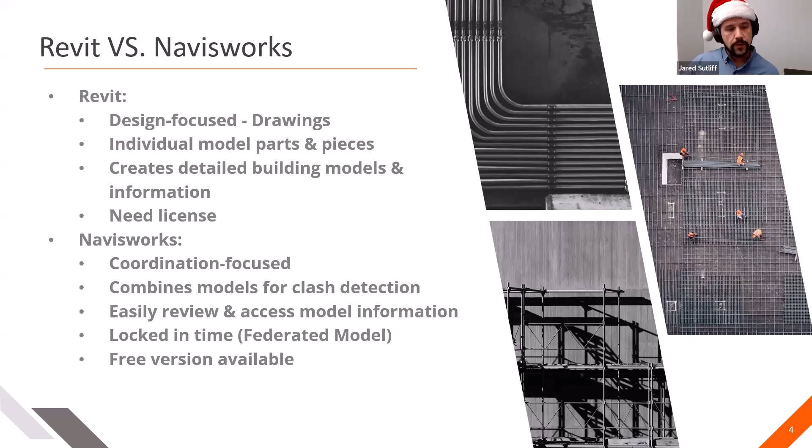Navisworks itself has 3 different versions: there's the Freedom, which is a limited version, Simulate, which is an expanded tool set, and then Manage, which is the full gamut, which allows you to do the clash detection, coordination, etc. The 3 main files that Navisworks utilizes are NWDs, which is taking all of the different models that merge together, and that's that federated model locked in time; the NWC, which is one of the exports available out of Revit and some of the other 3D modeling softwares; and then the NWF brings all of those different merged models together, which is then what we utilize.

So getting started here within Navisworks, when you first open up Navisworks Freedom, there's a few things that are important to start off with. First off is going into the options editor, under the N in the upper left-hand corner. We can expand this window out a little bit.

The most important thing to start off with is under interface, going into our display units. We want to change this from meters to feet and inches fractions. For display precision, you can choose any one you want. I'll typically stick with a 16th or an eighth of an inch, whichever is best suited for what you need to utilize within Navisworks.

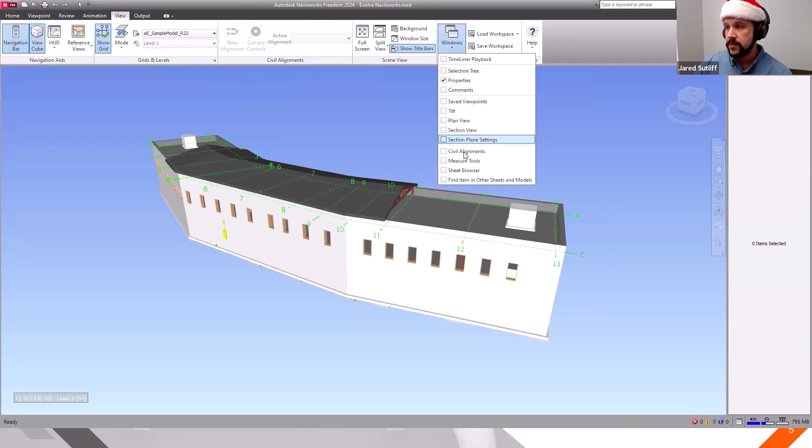We can also find our properties window under the view tab, and we've got our windows drop-down right here. This will give us all the options of any additional windows that we want to utilize.

I also like the selection tree, because it gives me a little more information as to the files available within this NWD, and that'll help you navigate and find which subcontractor the model is a part of.

I will also turn on the saved viewpoints. This is important because any of these viewpoints gives you a location that will automatically jump back to a specific camera spot. So let's pretend you're running around and all of a sudden you're lost in space and can't find the model at all. With the saved viewpoints set up properly, you'll be able to just select that and it'll bring you back to that specific point within the project.

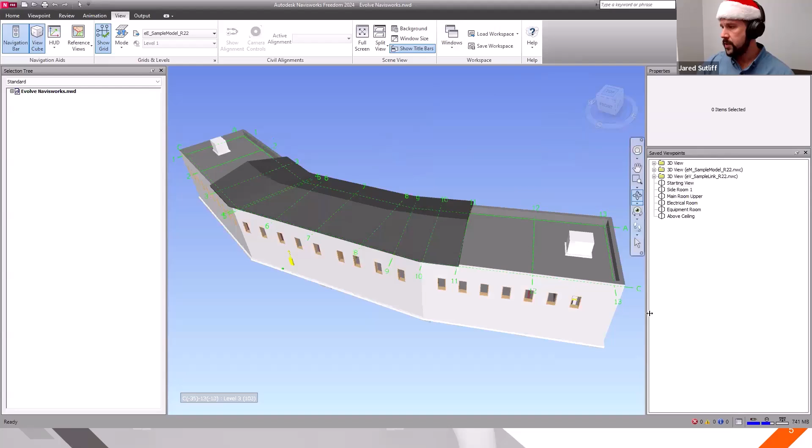And then I also like to have the plan view. What the plan view is going to do here for you... I have it hidden somewhere, I'm not sure where it is, I must have it docked in a different spot. But what that does is give you a separate window with a top-down view of your model and building, which helps you understand and navigate to where you're at when you're flying around.

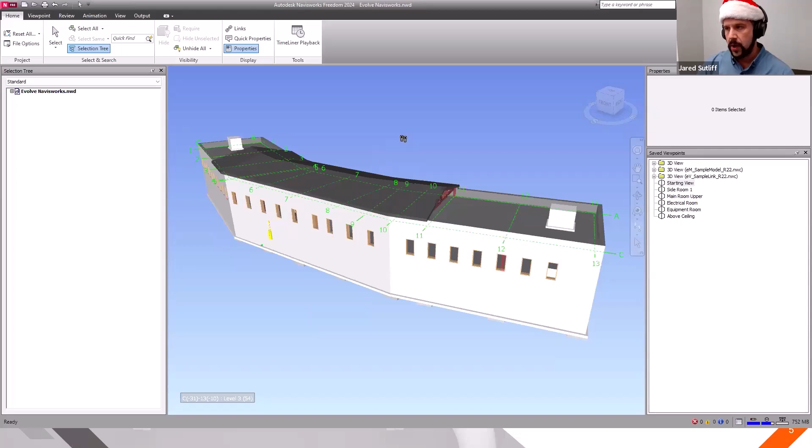So as we proceed, there's a couple of tools, and it's going to be a bit of a pain to get used to. But I recommend forcing yourself to learn the walk command. It's a little bit like a game, and it utilizes your mouse for all the tools. As you can see, the little feet icon here, if you left click and hold the button down and push your mouse forward, you'll walk forward.

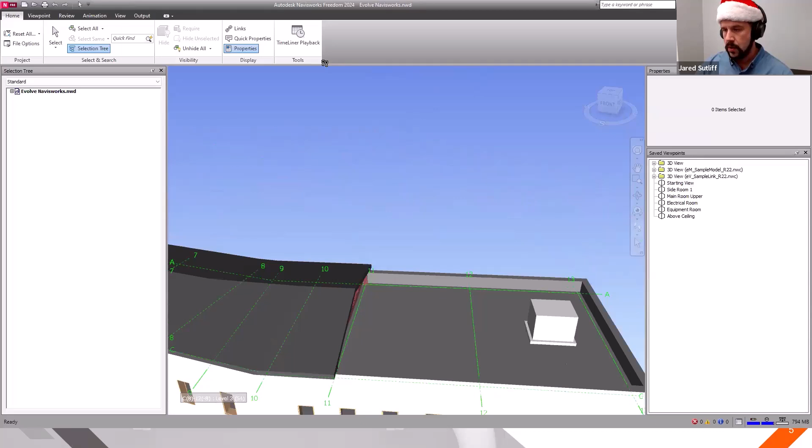If you pull the mouse backward, you walk backward. And if you turn to the right or left, you can see it rotates the camera. Any combination of these lets you move forward and roll around, so it's like you're walking through the building using the mouse.

It also combines your pan into this single tool. If you have a mouse with a middle mouse button, depressing it gives you the pan, which lets you move up, down, left, and right on a single plane within the space.

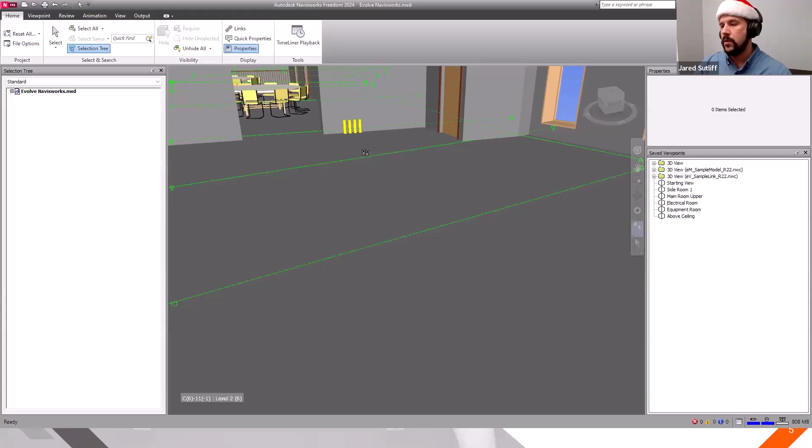If you roll the mouse button backwards, you'll tilt the camera up. If you roll it forward, you'll tilt the camera down. That said, there are also other tools available on our quick access toolbar.

If you hover over it, it brings up a little window, with our pan tool. With that tool selected, I left click and hold, and as I move and drag the mouse around, I can shift and move via the pan, same as depressing the middle mouse button.

We can also use the zoom window. If we select this tool and left click, hold, and drag, it brings up this little box, which zooms into that portion of the model you were trying to focus in on.

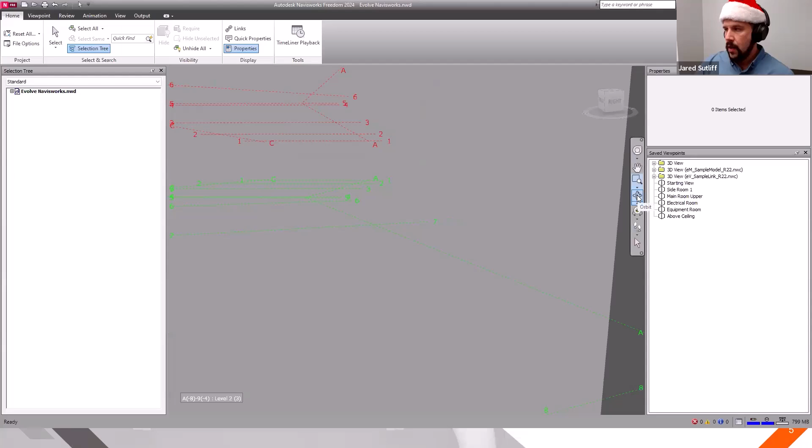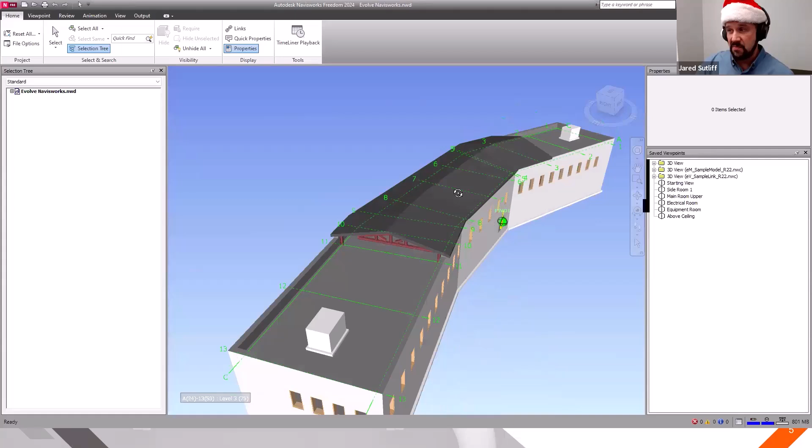Our orbit command does just that. It has a specific pivot point on our building, off to the corner here. The pivot point has given me some trouble in the past—sometimes it'll snap to a point of the model that's say, like 10 miles away, and as soon as you rotate, you lose track of where you're at. But this is an option.

If you select the object, it'll allow you to focus in on that, with your pivot point in the center of that object. I just did a right click, which allows me to select a specific object—for instance, in my main room here, I left click and select this clearance zone, and with my orbit, you can see it centers in on that selection.

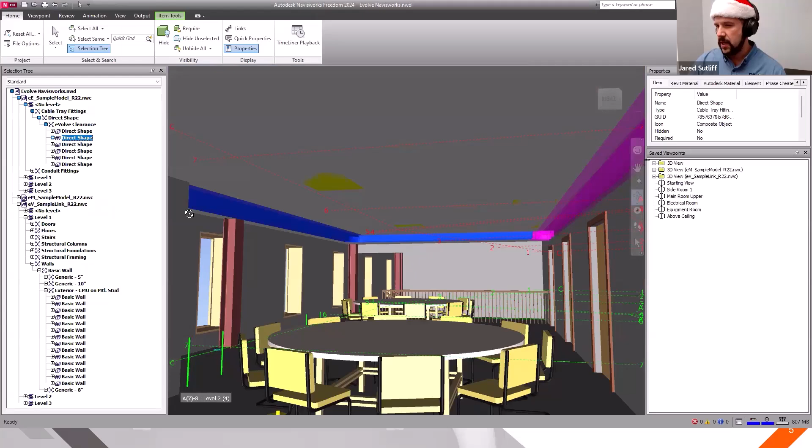The next one is look around, which is pretty nice if you've got yourself into a room, say like the electrical room here, and you select the look around command. It just rotates the camera on a swivel, so you can really get a sense of what's going on as if you were standing in that room specifically.

And then the last one here is our select. That allows you to go through and use your select—instead of right clicking to select objects, you'll be able to select each of the individual components within your model with that.

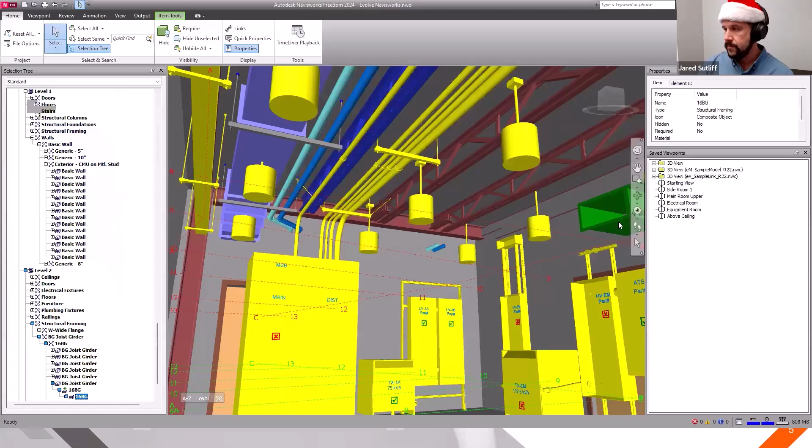With our walk command here, I'll go back into our starting view. If you have multiple monitors and want to free up space in your main window, any of these additional tool windows, so long as they have the pin command, can be moved.

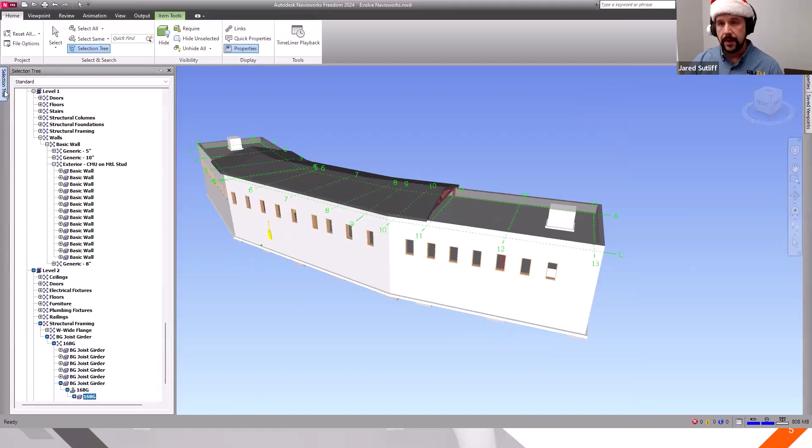It's an auto hide feature, so if you have them unpinned, you'll see it puts the tab on the side. If you have it pinned to your main window, you can grab the title here, and that brings it into a secondary window that I can move to a different screen.

If I want to place it in a different part of the window, I can do that as well. As I left click and hold, it gives me some options with these little icons, showing the size and space I'm able to use. If I go to the center, it leaves it as a free secondary window. In this case, I'll leave my selection tree tied to the left-hand side.

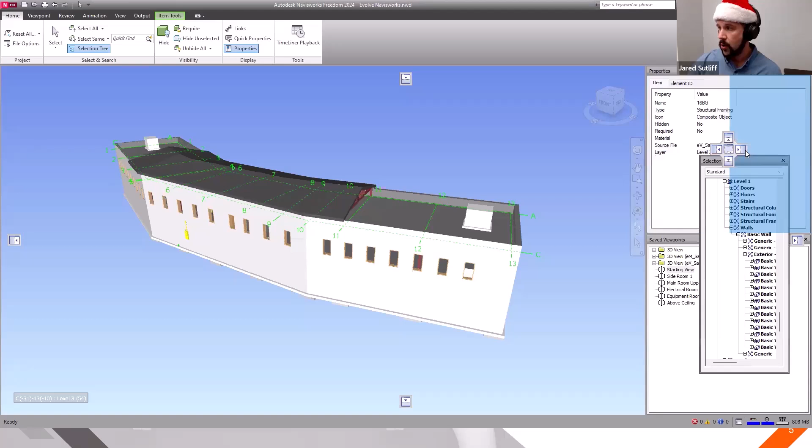Same thing with the properties and the saved viewpoints. The other nice thing you can do, if you want to have them all grouped together, is come over to properties here, and you can tie them into just this secondary properties window. So if I want to have them side by side, I can. Otherwise, if I hover over the top, it'll put them into individual tabs that you can bounce back and forth between. It gives you the flexibility to set this up exactly how makes sense to you, with the tools you utilize most often.

As you can see, when I brought my selection tree over, it still kept the properties tabbed together with that. To move it, all I have to do is grab the tab there, and now you can see it separated out those windows. I'm just going to dock this back over here.

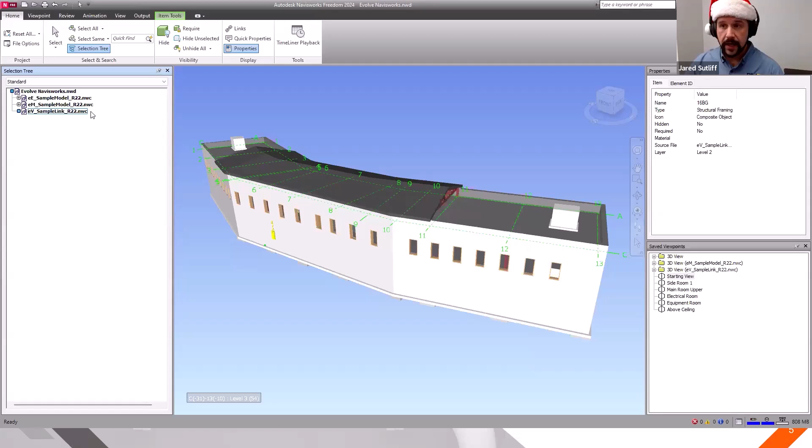So now we'll jump into the individual models that we have here. This is that Navisworks document, NWD, that I spoke of earlier, and it's combining these individual Navisworks cache files that were exported from Revit. Within each of these, I can select one and it'll highlight everything involved within that specific NWC. You can also hide these elements—in my selection tree, I right click and hide. That allows a lot of flexibility to turn models on and off if you need to see something specific or find a location within the building, like the electrical closet.

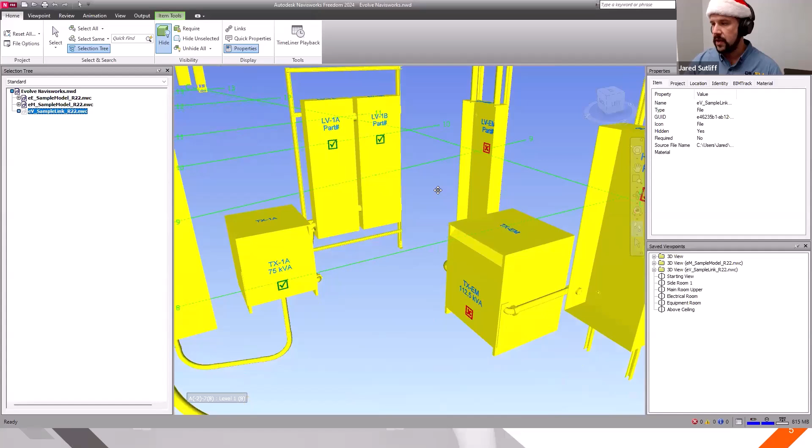If you don't have any viewpoints set up for it, once you feel like you're safely in this electrical closet, you can right click again and use the same hide command, or Control H, and that turns the sample model, structural, architectural, back on. Same thing goes with the EM and EE, the Evolve Electrical and Evolve Mechanical models that we have here.

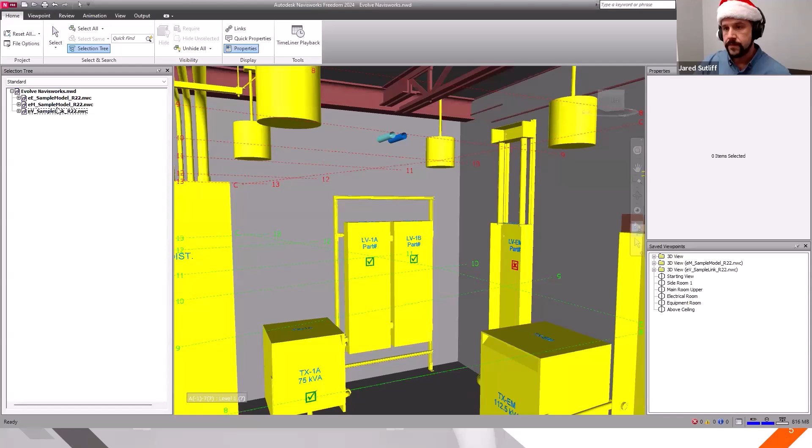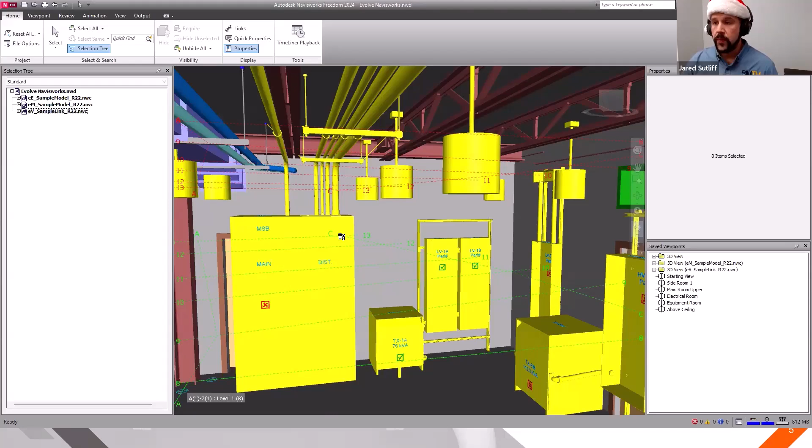The coloring of the models that we have here is all done within Navisworks Manage. If the colors haven't been adjusted before the NWD is created, it'll just be the standard textures and materials that come out of Revit or the 3D software program used to create the export. So this may look quite a bit different—oftentimes general contractors will have what's called an appearance profiler to color code the different systems accordingly.

So for instance, in our case, I'm going to use my selection and select this pipe here. You can see it's bringing us to, it'll automatically open up all the different subcategories to where this specific element resides within the different categories of the export. We don't have a ton of information in our properties right now, because it's selecting just a very specific element.

So if we go up one more level to the main element here, now you can see in our properties window we have a lot more information available to us. This is where utilizing the model to your advantage is great, because any property information put in, say, Revit, will come out in the element here itself. So you can see we have these properties—these are all the different specific elements within Revit, within this pipe itself.

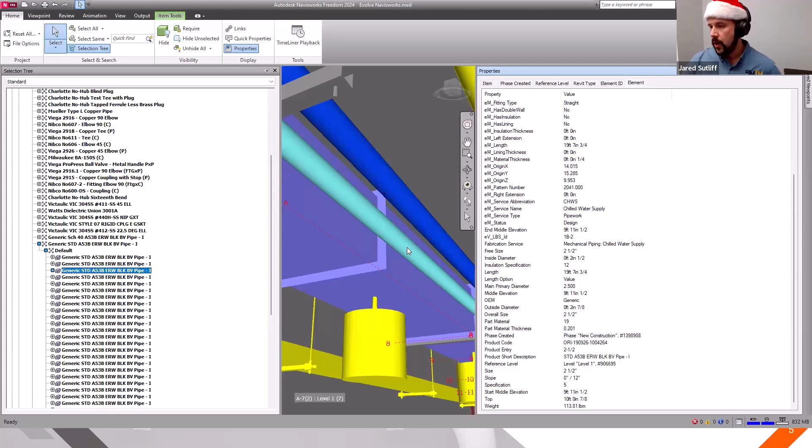Now you're able to take a look at this and start gathering additional information, if for some reason it wasn't available on, say, install drawings or other information sent your way. In this case, this happens to be a chilled water supply. The middle elevation on the end is 9 foot 11 and a half. The inside diameter is a 2.5 inch pipe. The length is 19 foot 7 3/4 inches. You can see all these different elements—this helps with knowing what it is you're looking at and verifying this compared to other elements within your project.

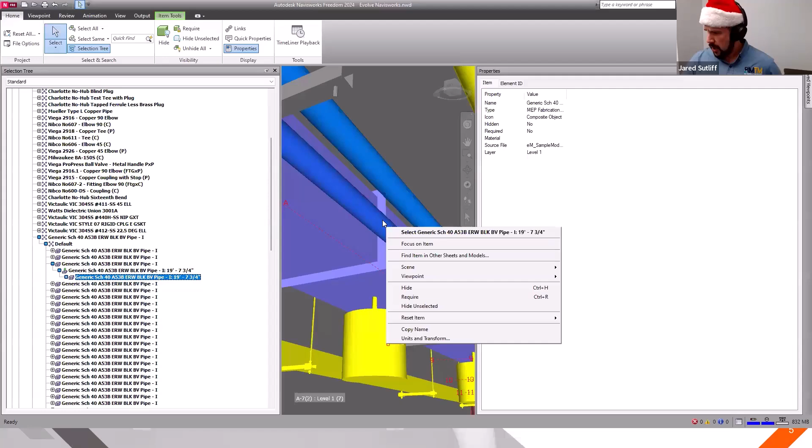If we go into our selection here, you see how it keeps going down to the base—we can change that. If we right click our selection... actually, this might be, my apologies, I'm so used to using Navisworks Manage where you're able to set up what you select when you do select an object. Could be that I need to do it here—no, okay. So just keep that in mind as you go through. If you're not seeing the elements you want in the properties, it will be in your selection tree, and just make sure you have the proper part of it so you can get to the element.

I touched base a little bit on the properties here. There's also an element you can use within your options as well, the quick properties. These definitions here that we have, the category is the tab, in this case, of the properties of the item that you have selected.

With these quick properties, once they're set up for your department or your company, when you export these, this will go across. So you could set up your options for the field, and have it set up differently for the BIM department if they want different quick properties.

So as you can see right now, the category is going to be item and the property is going to be name. So if I go into my item, the property is the name. With the quick properties, it's going to pull this. If this isn't really descriptive and not what you want to see, then we can adjust and change that.

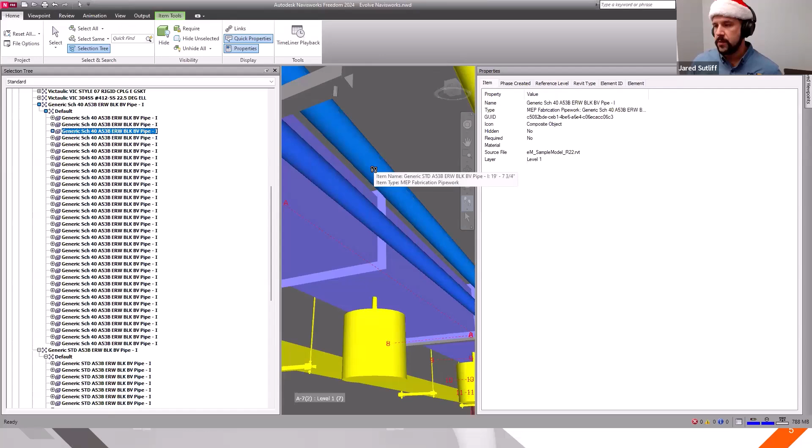What the quick properties are here, if we turn them on under our home tab, if you hover over an element, it brings up this little sticky window and gives you that additional information. The little sticky window won't stay there forever, it'll hang out for a while and then eventually disappear. But any element you hover over, it'll bring up that specific information.

So if I'm interested in mechanical pipe or supply and return here, under my options I'm going to change the category because I don't want the item, I actually want it from the element. So my category now is going to be element, and my property is what's in this column here. I want it to be, in this case, the EM service name.

So when I'm in here, if I just hit E on my keyboard, it'll bring you down to the E category, so EM service name. As you can see, there are a lot, so it might take a little bit to get into exactly what you want it to be.

I also want to know the bottom of pipe, let's say. So I want to go into element again, and then bottom. And then if I want to add any additional information, which in this case I do, I can go to add element here, and it's going to add another one. So you can see it saved my element service name, element bottom, and then added it to the top here.

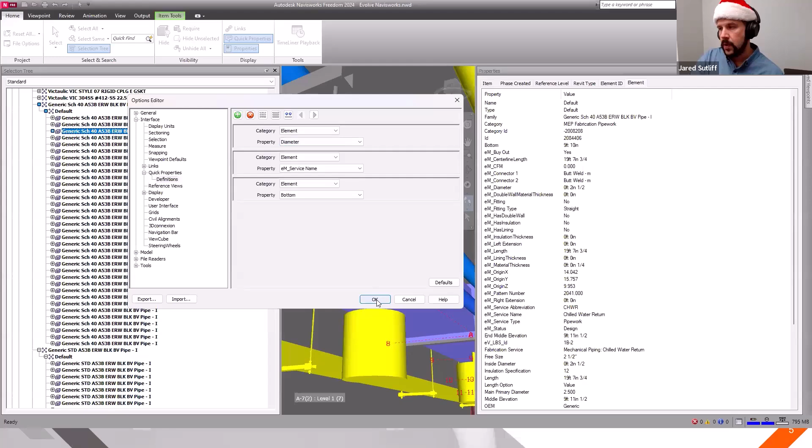So if I go back into here, and change the diameter to, let's say, the first one now, and hover over, that's not it either. So when setting these up for your individual department or the field, if you create an NWD of just your specific trade model, it'll limit the number of properties available, which is going to be helpful when dialing in your quick properties for your field teams.

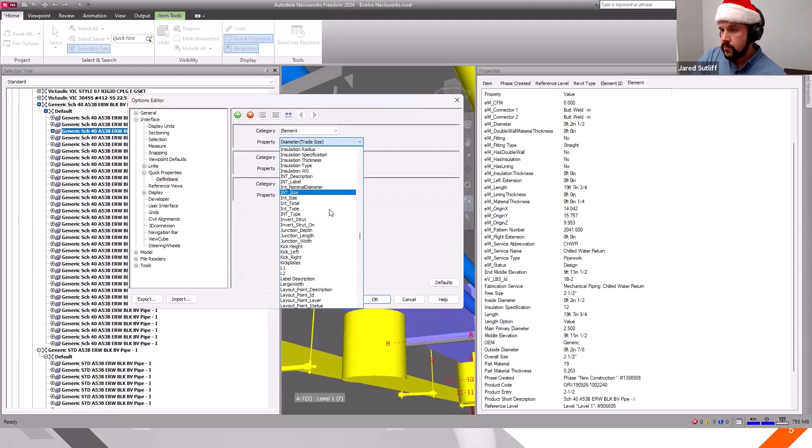All right, and that's not giving me what I wanted either. Let's do, instead of trade diameter, let's do inside diameter. All right, hopefully, yeah, there we go. So finally came across the right model parameter. And now you can see inside diameter we have 2.5, the service name, and the element bottom.

All right, so any questions thus far? I know I'm throwing a lot of information at you for those not very familiar with Navisworks and how it all comes together. We can take questions now, or if you want to hold them till the end, I guess we can cover specific items as well.

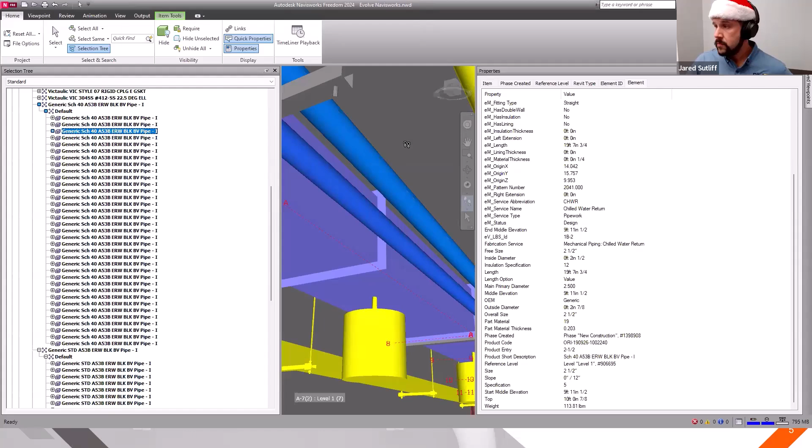So I'll reduce the size of my windows here. And as far as any of the specific elements within your Navisworks file, if we do have, as I've gone through the viewpoints here, it'll automatically get you into the saved viewpoint.

One of the other tools that's incredibly important, and we set it up initially, I've had field teams I've worked with in the past who asked, is there a way you can change the units, because we're tired of doing metric conversions. That wasn't something I had thought about, but of course, so instead of having to do the conversions, that's why it's important, and I have you set that up the very first thing that you do.

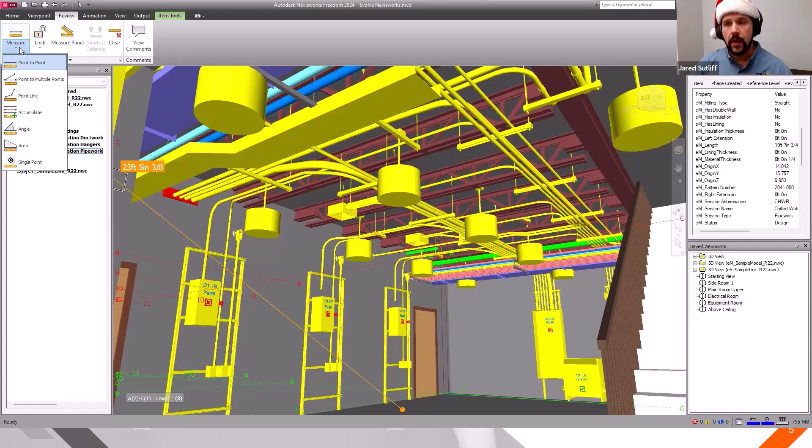There's a couple of different measuring tools we can do. You can do single point to point. You can do multiple points. You can do a line. You can accumulate the total length of the distances you're selecting. You can also get a specific angle of your 3 points. You can start defining and getting areas. And then you can also display the coordinates for a single point.

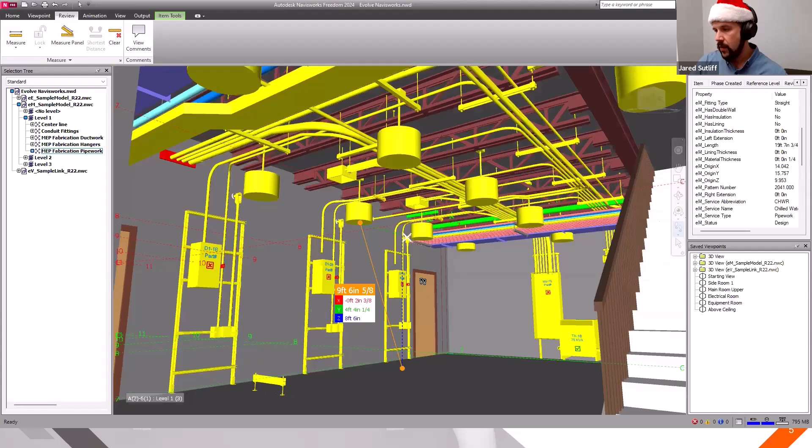I often use and stick with point to point, because as I'm doing coordination, I may need to know the difference between the X, the Y, and the Z. In this case, since I'm utilizing the points, the X, Y, and Z pop-up window here - my straight line to line is 9.6, but we know that's not the elevation to the bottom of the fixture, because we have our X, Y, and Z dimensions from the point to the point.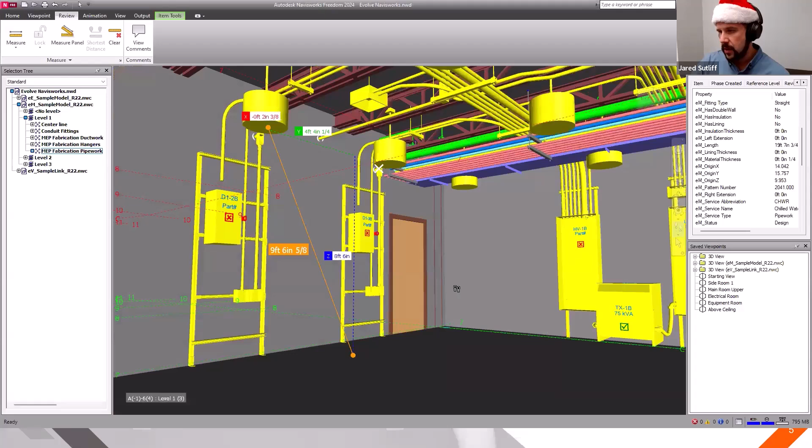It's kind of hard to see here, but actually that was a pretty good set. So you can see the dashed lines here that show where each of the individual dimensions are coming from. It's a great way to verify if you need to check out, say, sleeve locations, or verify the height based off of the coordination.

You can use the dimension tool, or once again the properties here as well, and it should all match. In this case, the elevation from level is 10 foot 12 inch, so 11 feet. So that happens to not be to the bottom of the fixture itself - it's to the top up here.

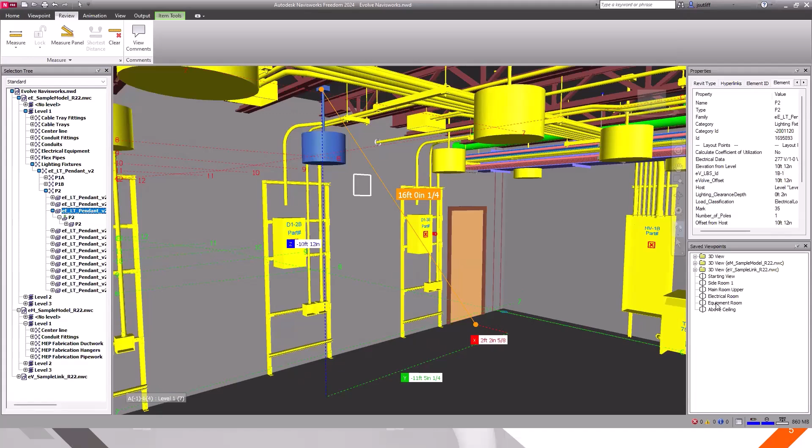So let's do a quick check, we do have a question in the chat. It says, at times it can be hard to see what viewpoint you have selected with the very light green highlight. Is there a way to change this setting so you can more easily identify which viewpoint you have selected? So you're talking about the highlight here.

Yeah, because as soon as you move away, it will unhighlight the viewpoint that you're in, because now you've moved away from that specific camera location. So I don't necessarily have a good way of maintaining the highlight on in the viewpoints as far as which area you've been in.

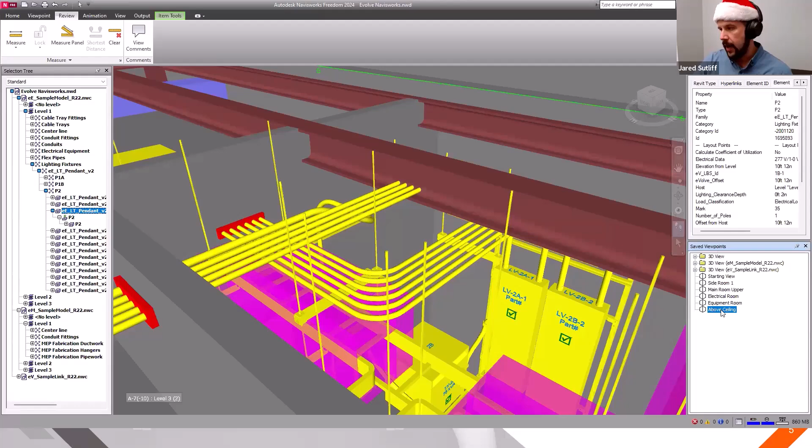One thing - this is actually probably just a manage function. In manage, you can create folders like you see here, and then you can organize the viewpoints within each of those folders, so that you can have, let's say, 4 or 5 viewpoints of this specific closet. You can get those created, put those in a folder, and say room number A52, and then you'll know that's the exact room number you have.

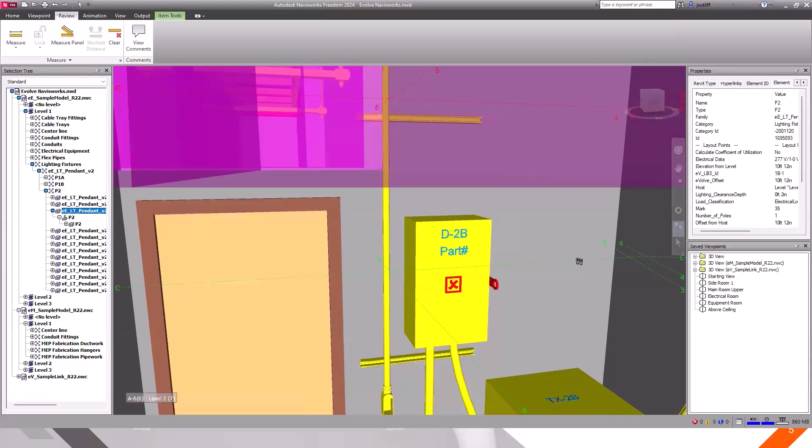We also have a second question: how can I use this to communicate with my BIM team more effectively? Am I able to mark up issues?

Unfortunately, with Freedom, you're not able to mark up issues. There is the comments window, but I haven't used this a whole lot, unfortunately, because I almost exclusively use manage. That's how I'm able to relay a lot of that information by creating viewpoints or utilizing some of the other tool sets that are plug-in to Navisworks. So that would actually be something I'd have to explore a little bit more.

One of the ways that I have utilized communication back and forth from the field team is if they are in a specific area and they fly to the area in the room that they want, they can create some dimensions.

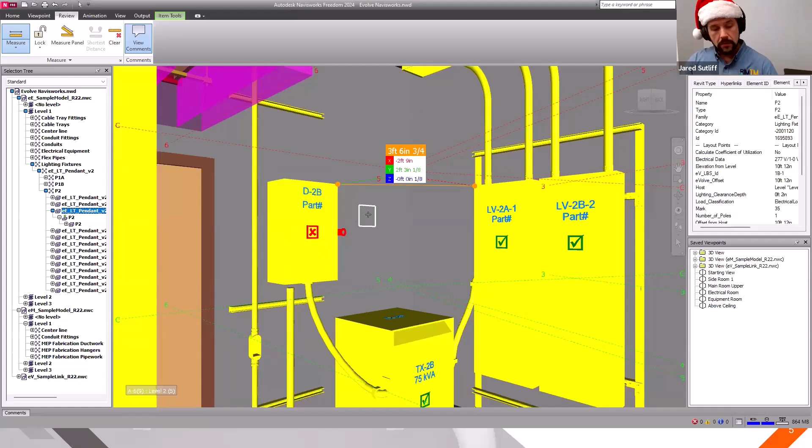What they'll do is take a screenshot of that specific area and send that to me with a description of the questions they have. Or even better, instead of going back and forth between emails and screenshots, I prefer hopping on a call or heading down to the field and sitting directly with the foreman to resolve issues with their direct input, instead of making assumptions.

Screen shares often work really well because we're looking at the exact same thing. You're able to ask questions as we're viewing a specific area and get through those that way.

We have two more questions if you'd like to continue, or are you okay to answer these two regarding BIM 360 and Autodesk Construction Cloud? Yeah, we can take those.

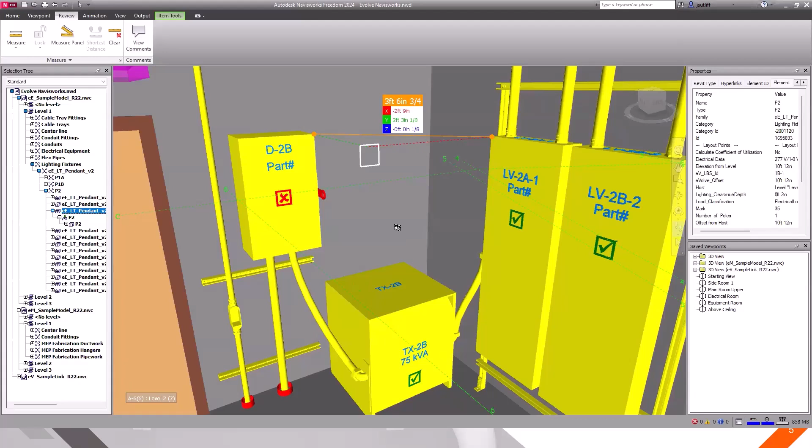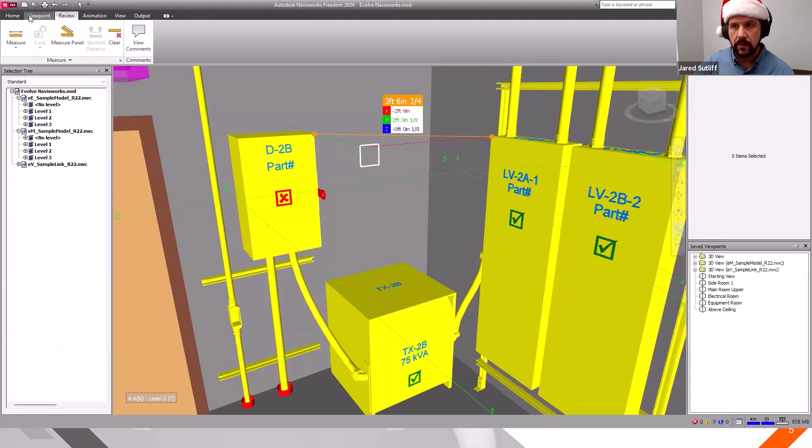Is this the same as the BIM 360 web viewer on my tablet? This is not - it's a separate program. The functionality is similar-ish, but since this is a standalone program, it gives you more functionality than the web viewer. The web viewer is nice because you can still fly around and go through walls to look at different elements. But in my experience, the Navisworks Freedom viewer and NWDs make it a lot easier to fly the model and explore the areas and elements you need, especially with different levels and models.

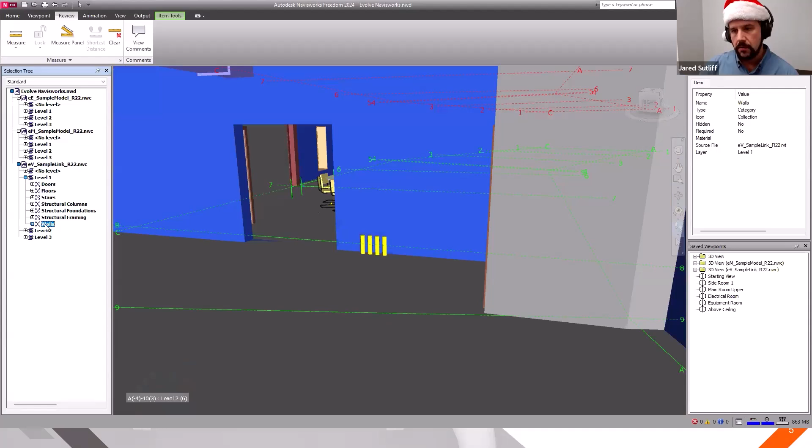If you need to turn certain things off, say like walls, we can turn off the walls, and it's a lot easier doing that just by selecting and hitting Control H, or right clicking and hiding the specific elements. Not saying it's impossible otherwise, just in my experience it's a lot easier utilizing the standalone software.

Does Navisworks Freedom integrate with Autodesk Construction Cloud issues? I don't know how to answer that, unfortunately - my primary experience is with Manage.

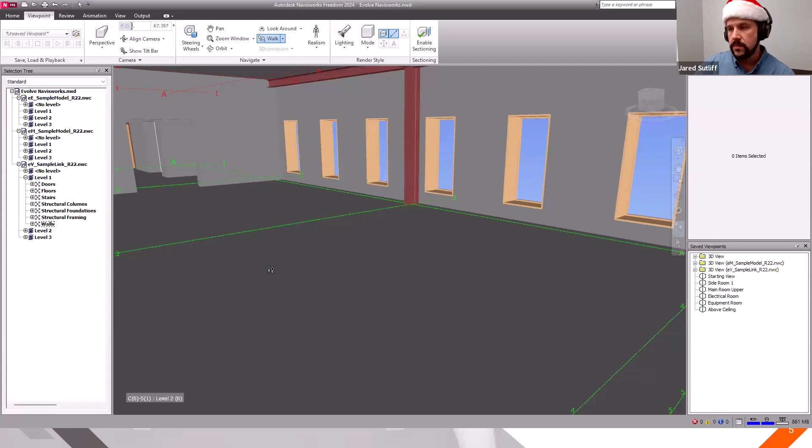I know Manage has a collaboration tab which allows you to turn on the issues themselves. I think it would be an excellent addition if Autodesk added that to Freedom - not to create issues, but at least to view them. That would be an awesome change to Freedom. It's unfortunately lacking. I understand why, but there are some minor things that I think would really improve the overall experience with Navisworks Freedom, like being able to create your viewpoints.

So from the previous question about sharing information from the field team back to the BIM team - if you'd be able to create your own viewpoints and export those, I think that would be an excellent way to merge the tools for those specific teams much better. That's a great thing to write to Autodesk and say, hey, this would be awesome if we could do this.

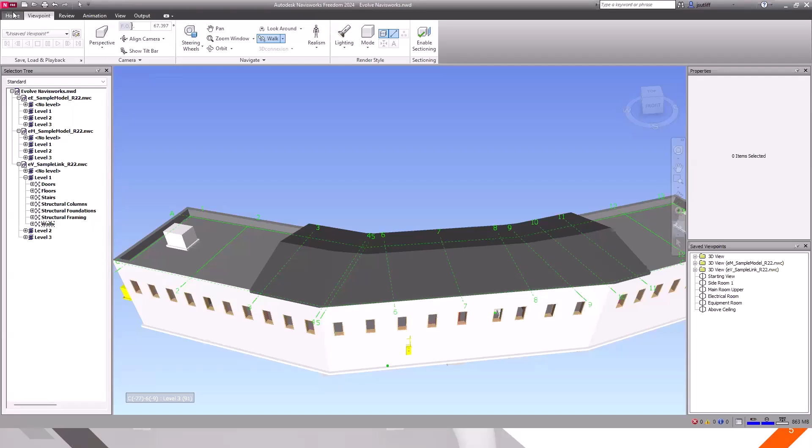Hey Jared, I actually have a question of my own. But before that, I just want to say great job with this intro. I feel like Navisworks Freedom is so much cooler than I thought it would be, because I myself have only used Navisworks Manage.

Really my question is, can you run us through some of the highlights you get with Navisworks Manage versus Freedom? Sure. So some of the highlights you get with Manage versus Freedom - the biggest one is being able to run clash models.

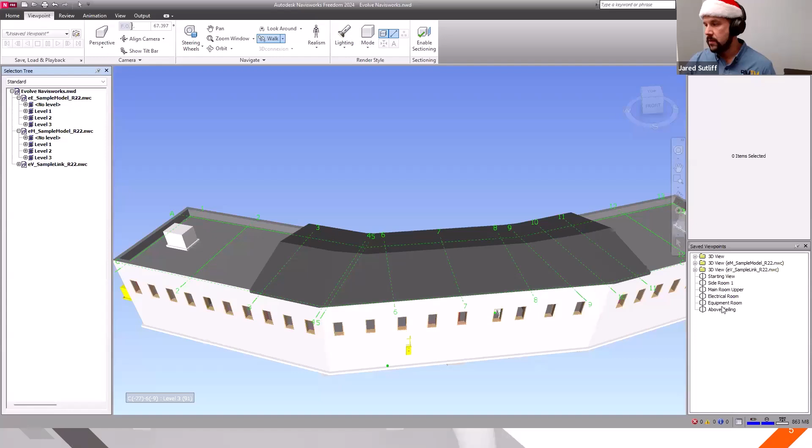For instance, if I go above ceiling here, we can see there's a clear issue with the conduit at the structural steel. In Freedom, you actually have to fly around and find this, whereas if we had this in Manage, we'd be able to say, hey, I want to clash all electrical versus all steel, and it would highlight those specific elements.

Another great thing is being able to create viewpoints and mark them up - I'd be able to put text on the screen, draw arrows, lines, circle items. Actually, give me just a minute - I know this isn't exactly part of the plan, but I'll open the same model here in Manage so we can do a direct side-by-side comparison.

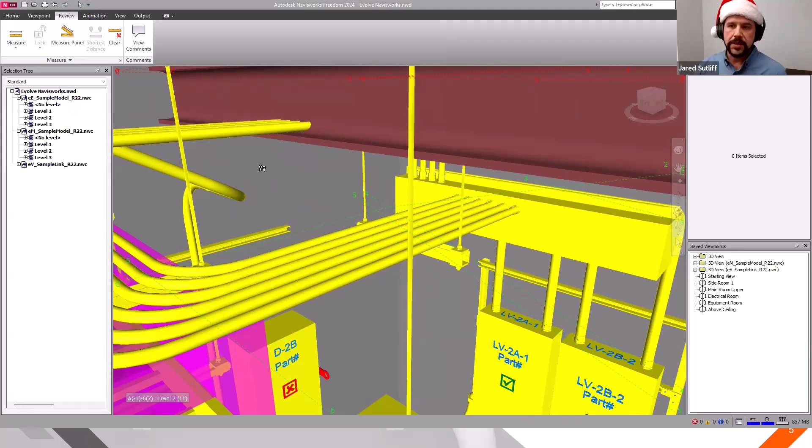The other great thing you can do as well is make what's called a search set.

So if I wanted to find everything that came from, say, panel 2B electrical 1, for this particular conduit, I could make a search set that would find all of those, and then color code those slightly different so I would know these are the conduit runs I need to focus on, this is where we're installing next, and then have that color coded difference.

So for instance, if I do 2B, ELEC1, you can see it's going through and finding each of those elements that have that parameter within it, and you can see the selection tree.

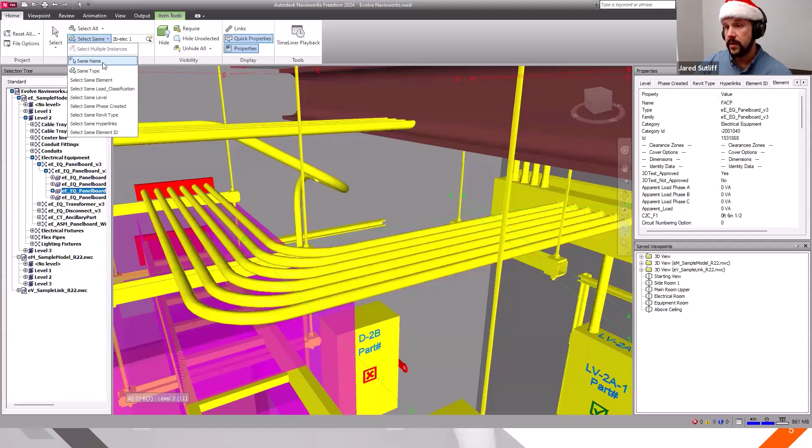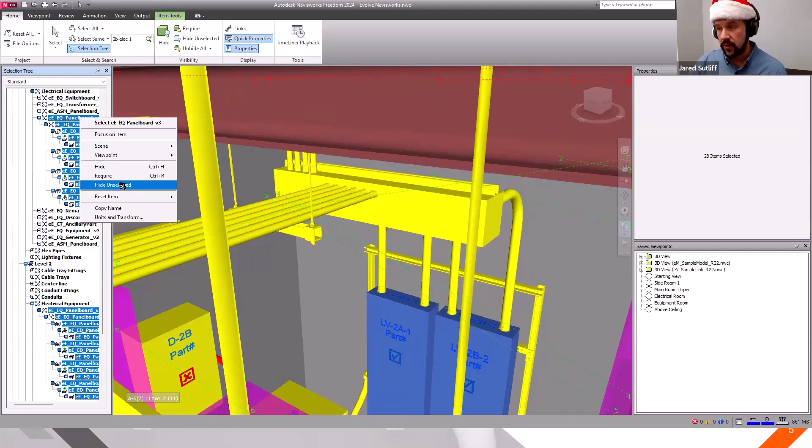I can also select the same element, select the same type, or select the same name. So if I select this panel, I can select everything that has the same name, i.e. EQ panel board, then I can hide unselected, which turns everything off except the panels that I have. So you can see this is where all of those panels reside.

The other nice thing too is if you have any elements selected and use your selection tree, you can select any one of these highlighted elements and it'll take you right to that specific object, i.e. this panel board itself. Actually, let me go there, then I can focus in just on that one selected element.

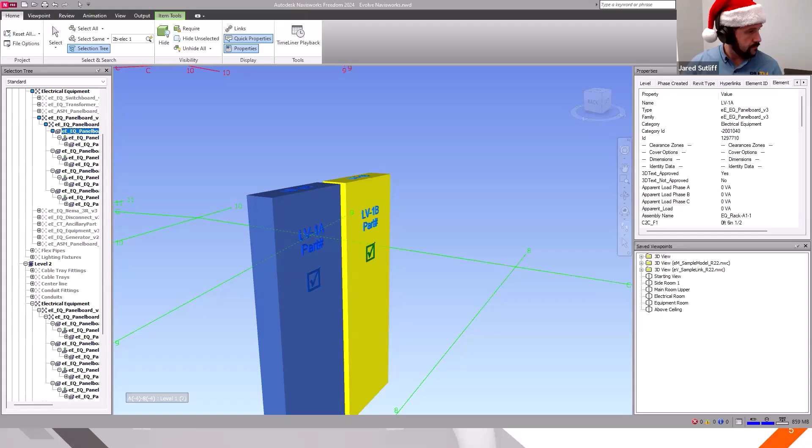So we do have this open, bear with me for a second. I'm going to open up the same file here and Manage so we can see them side by side. Okay, so here we have Manage.

As you can see, there's a lot of additional options up here. When we were talking about the ACC issues, this is the coordination tab, and then you can go into your manage issues - I have it open tabbed over here. So that's how you go through. If you use other plugins, namely BIM 360 Glue, which is actually old and has been replaced by Coordination, or Bluebeam - there are a number of different options.

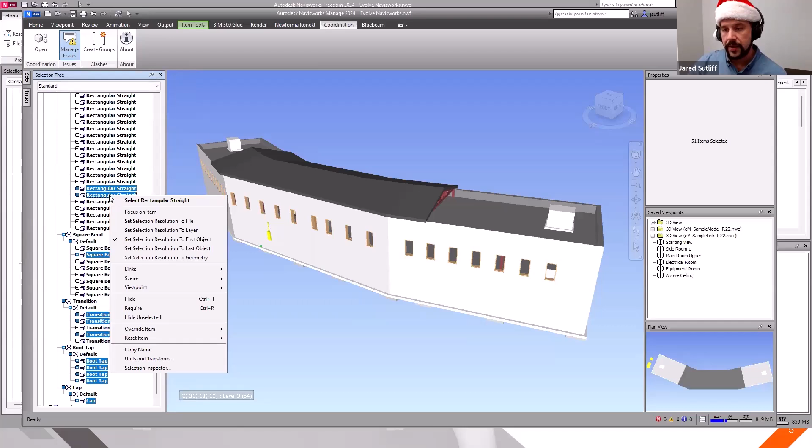The search sets - for instance, if I only want to find the supply duct, and I set these up previously since they didn't come with it, so this is some of the background work that needs to happen - I can select that, and now in my selection tree everything that is the supply is selected. Then if I hide unselected, we can see this is our supply duct in the sample model.

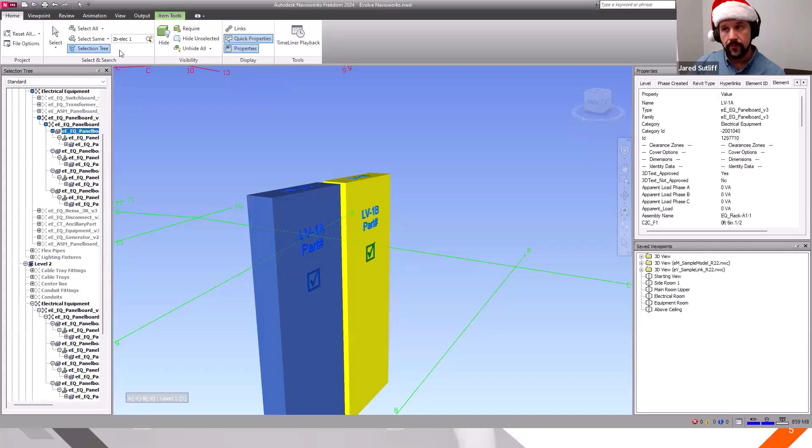Some of the other things - how we get the search sets is our Find Items. As we saw in Freedom, this is my only option here for finding items, whereas in Manage I can actually go through a specific model, all of these different property categories, the properties, conditions - if I want it to contain, equals, not equal, etc., I can change that.

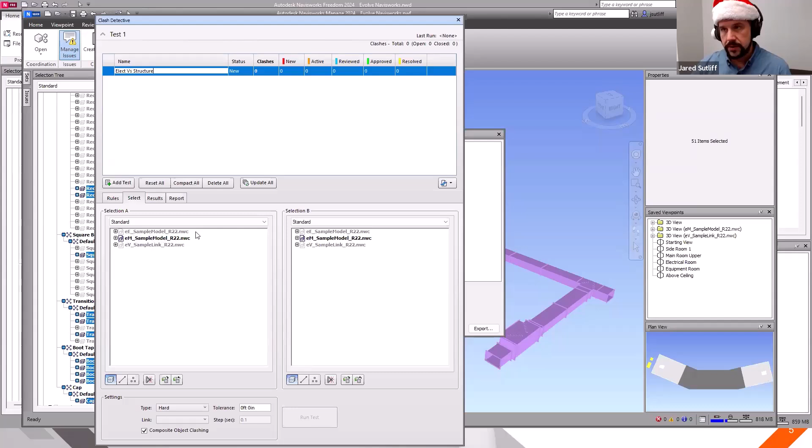And then the clashes itself, this is where we can create, like, electrical versus structure. And the one thing you do need to make sure you have on is your models, because if I'm clashing against nothing visible, there's nothing to clash against. So it's important to have all of the models visible within your view here.

Additionally, with the search sets, I can actually set up my sets. So let's say for this case, I want to do electrical versus structural steel - I'm doing my full model versus my search set for steel, and then I can run this test, and we can see there are 28 clashes.

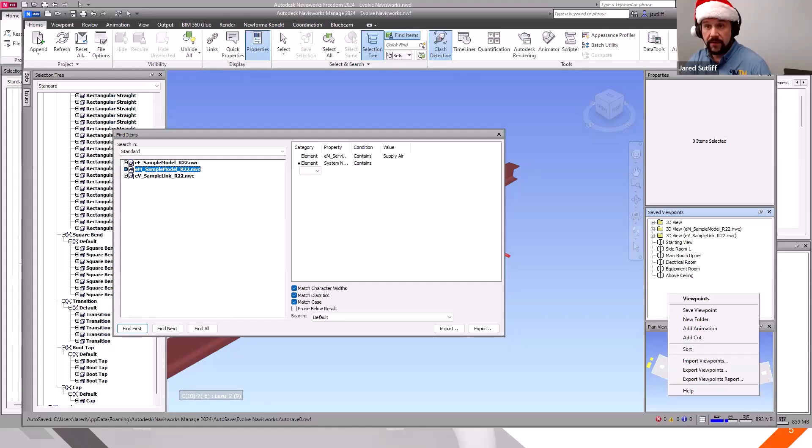So like I said, that's some of the big differences between Freedom and Manage, in addition to being able to save viewpoints, import, export viewpoints. We can add files, whereas Navis Freedom you can only open an NWD - in this case, I can bring in a number of different model types between NWCs, IFCs, OBJs, point clouds. There's a ton of different file types I can bring in.

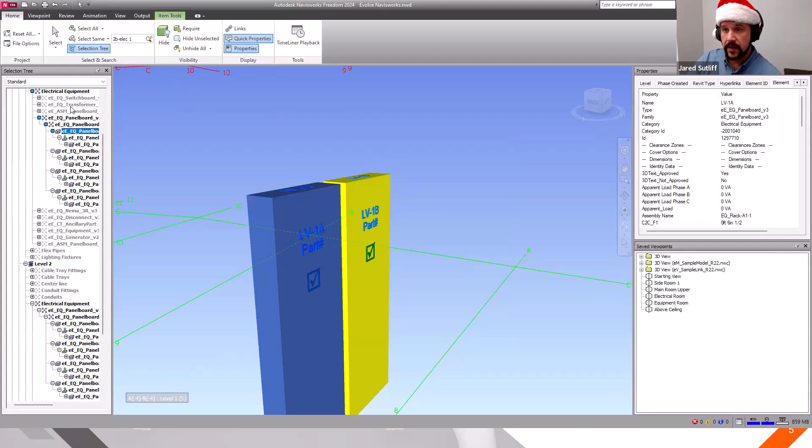So in this case, I'm back into Navisworks Freedom here now. There's one other thing I did want to show that is a capability within Freedom, thankfully - I've got everything hidden, so instead of trying to find and select each of the specific items, there's this unhide all, which brings you right back to having all of your objects unhidden. So I'm just going to back out here.

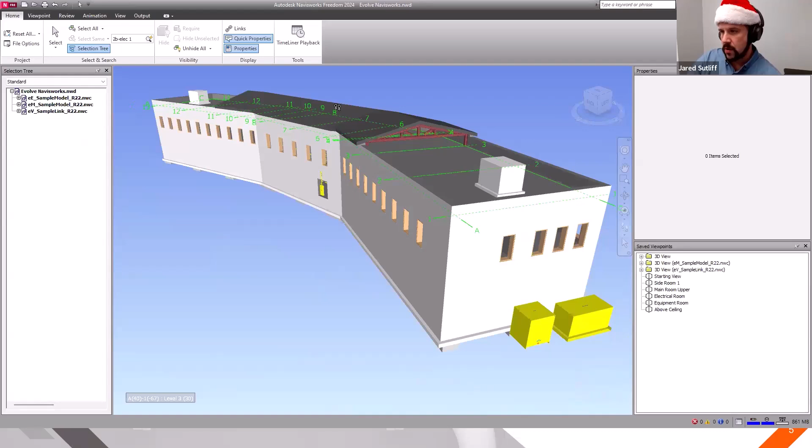Let's say I don't need to see all of this, the second floor visible here, just the overall of the first floor. If it's not preset up with a viewpoint, I can go under viewpoint here.

If I enable sectioning, this gets a little cumbersome. It takes a bit to understand how it all works. There's a couple options: I can do planes based, so you've got your 6 sides of a cube that move independently, or a box, where you move all of them together. But then your scaling and how you change where the different planes are is more cumbersome. So I prefer going with the planes themselves.

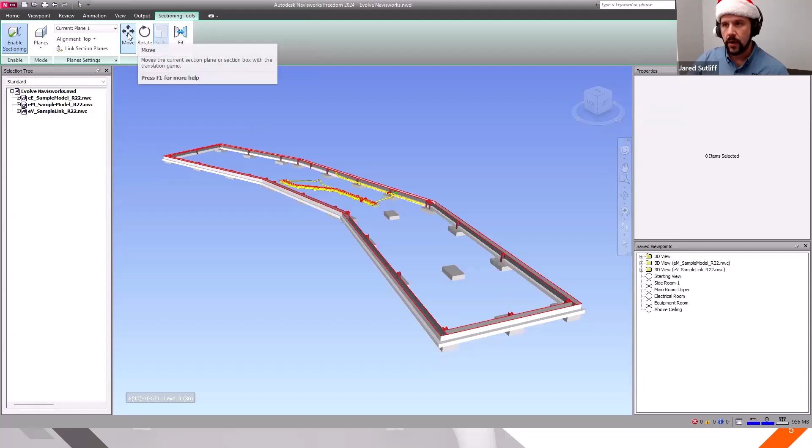In our drop down here, plane 1 is visible. You can see it's cutting through the building and it's aligned to the top, so it's the top of the 6 sides of our cube. Within that we've got our tools where I can move. Since it is our top, I only want to move it up and down, and as you can see it's slicing through the building really nicely. I wanted to see below our second floor here.

So if I bring it down and cut just through the concrete of the first floor, now you can see, okay, I'm imagining I'm flying above, able to see how everything comes together without having anything in the way.

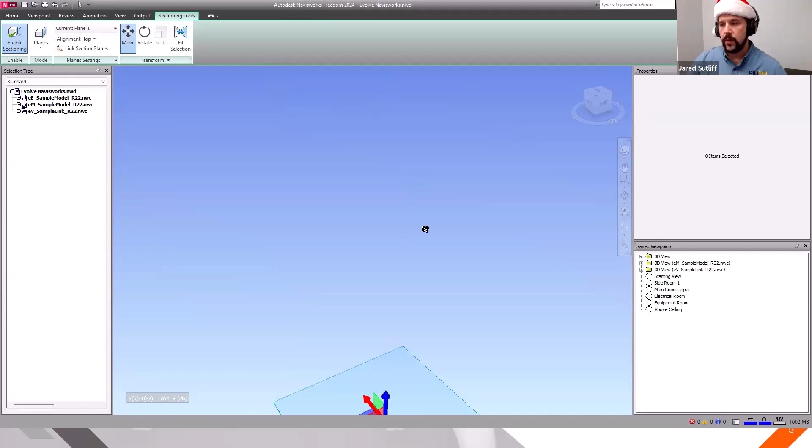Oftentimes, if it's not quite set up properly, your section cut will be way off into nothing. So let's pretend we can't see that - it's like, oh well, that's great. I can go through and turn off my top plane here.

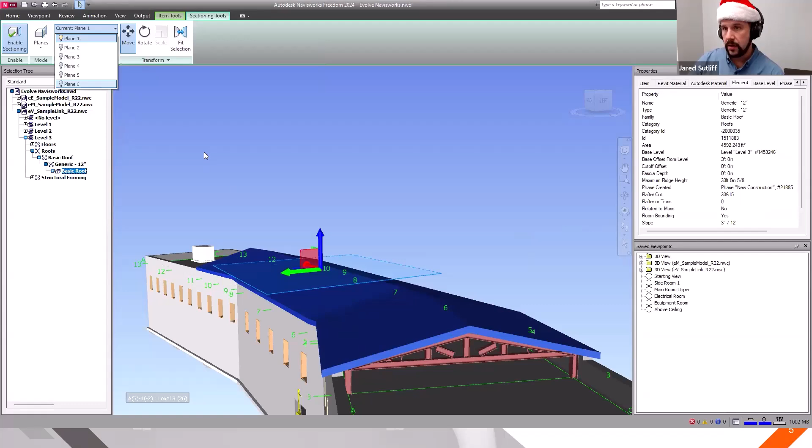What I can do is use my selection tool. I'm going to select the roof here, and I'm going to fit my top plane to the selection. When I hit that and turn my plane back on, you can see now my plane has been aligned to the object I had selected. Now I can bring it down. So if at any point your section planes have been off in the middle of nowhere, that's the easiest way to bring them exactly where you want them to be.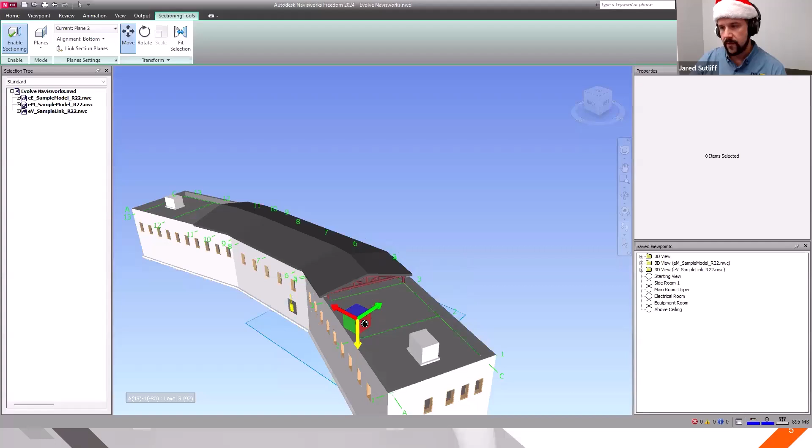Conversely, we can turn on our other planes here. I've got to make sure I'm selected to adjust. My plane 2 is the bottom, so you can see it's cutting the building looking the other way, from bottom up. Same with 3, 4, 5, and 6. If we go into 3, you can see it's our front, and if we're looking at our view cube, our front is pointing away from us.

If I bring this away you can see it's showing the building there. If I go to the back, we're at the back so it's cutting, and now we can bring it that way, so on and so forth. We can use a combination of these section planes to see different parts and elements of the building, and the fit selection can be used for any of the individual planes as well.

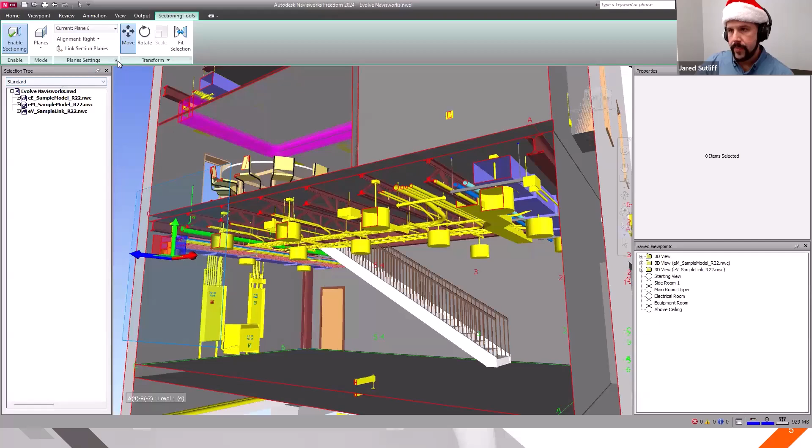That's the front plane, that's not this. There we go. So then you can bring this down and away.

The other nice thing you can do, let's say you're in a big building divided into, say, 6 equal parts based off a certain grid spacing. We can also link our planes together here. I'm going to leave the front and back off, and I want my right and left plane to be, let's say, 20 feet apart. If I link my planes, now as I move them, it moves them together. So you can set up different chunks within your building.

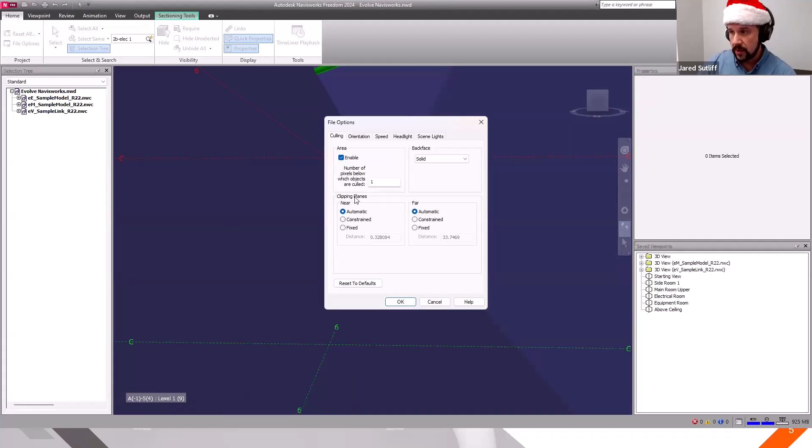So our near clipping plane is where, kind of like the section, is where I'm telling it I want to stop showing geometry. So for my near clipping plane, I'm going to change this to a fixed distance. It depends on the model. I have no idea where this is actually going to start, but I'm going to start at 1.

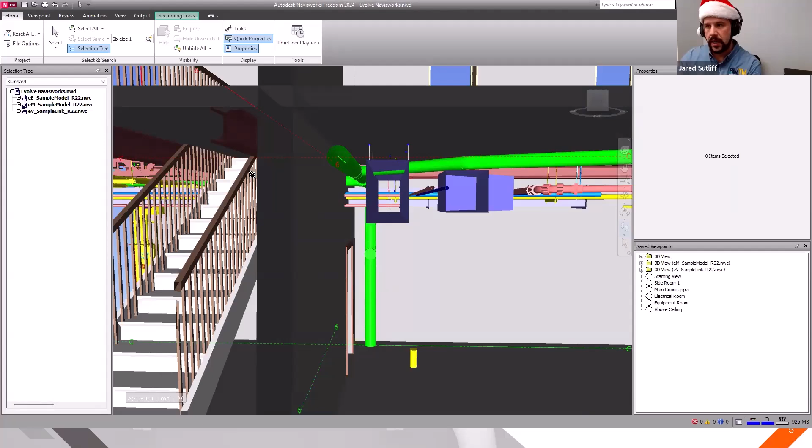You can see it barely changed the clipping right here. So I'm going to go back to like 0.1, and you can see the ductwork here is blocking the entire view. Now I'm going to change this to 10 so you can really see what this does. And now you see it pushed where the camera... this is just the camera, not one of our section planes, because as you can see, as I'm rotating, you're seeing other elements grow. That's because the section plane is at that certain spot based off of just my camera position.

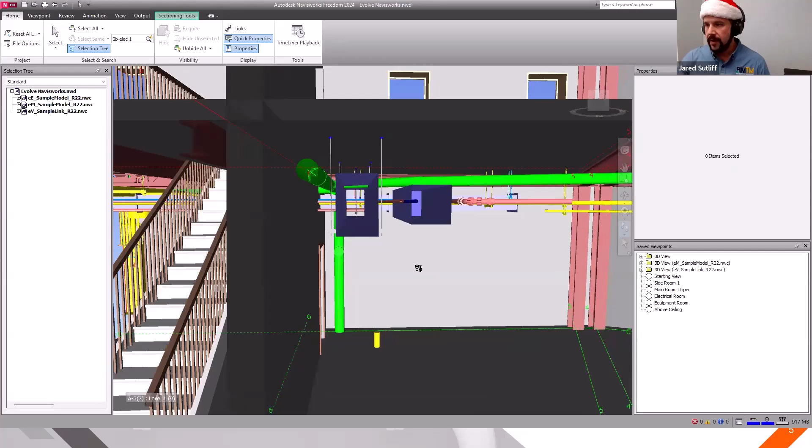So if you ever find yourself in a view where you need to see this a lot closer, but can't get any closer to view it, this is the reason why. Just remember your file options and change your fixed distance. In this case, I'm going to drop it down to 3. Well, now it's like, holy cow, where did I go? But that's because our clipping plane for our camera is much closer to the camera. So now you can see we can get into this and see what's going on here a lot closer.

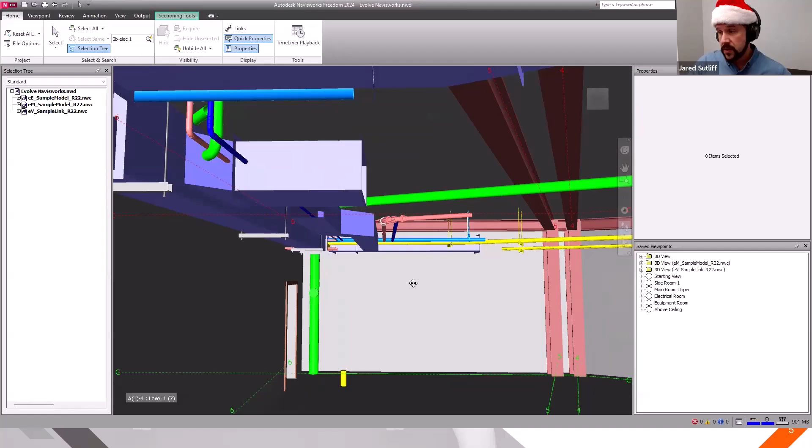So even with Navisworks Freedom, there are a ton of ways that you can use it. One other thing we can do here as well is there's also this realism feature. We can turn on collision, meaning you can't walk through any geometry. We can turn on gravity, and we can do third person. So let's say I'm in the ceiling here, and there are keyboard shortcuts to these.

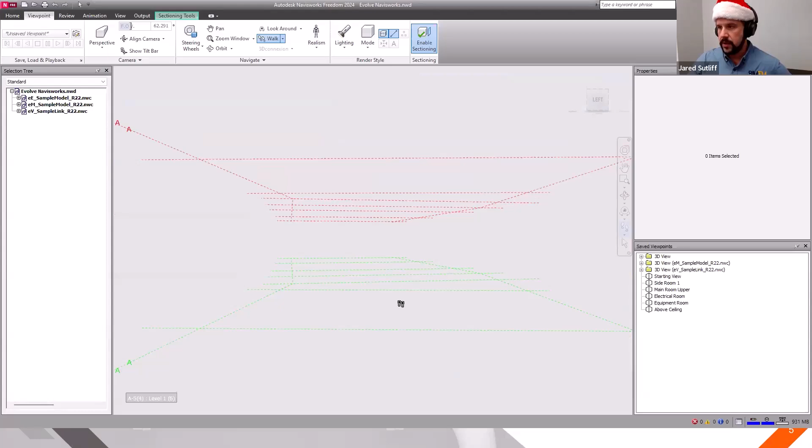So if for some reason your gravity's turned on, you see how we drop down. And the thing is, if I pan up and as soon as I move, I snap back down to the floor itself. Then the other thing is, with collision on, if I try and walk through these pipes, you'll see it kind of jiggles a little bit because we're quote unquote climbing over these pipes. And then I won't be able to go through the wall like it looks like I am, because of the camera clipping plane.

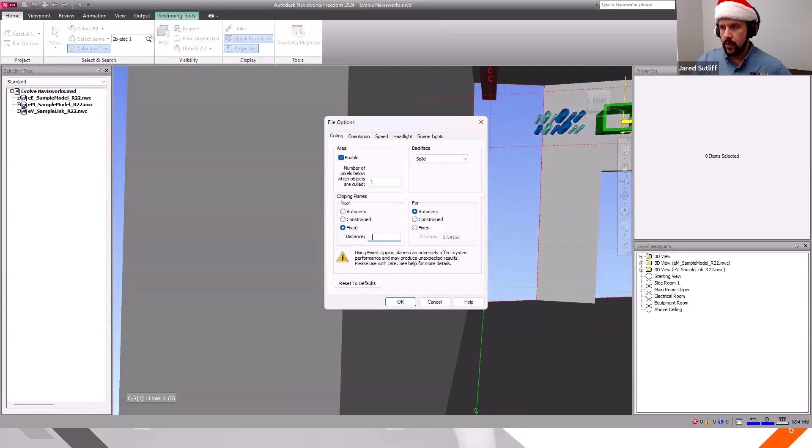But if I change this back to like 0.1, you'll see that I'm kind of stuck behind the steel here. So if you run into something where you can't fly through, remember that is because of your realism settings. And you can also go into third person, you can kind of see like it backs up, assuming a 6-foot person, so you can see how that would look from a different point of view. I'm not a big fan of the third person view, but it is an option there.

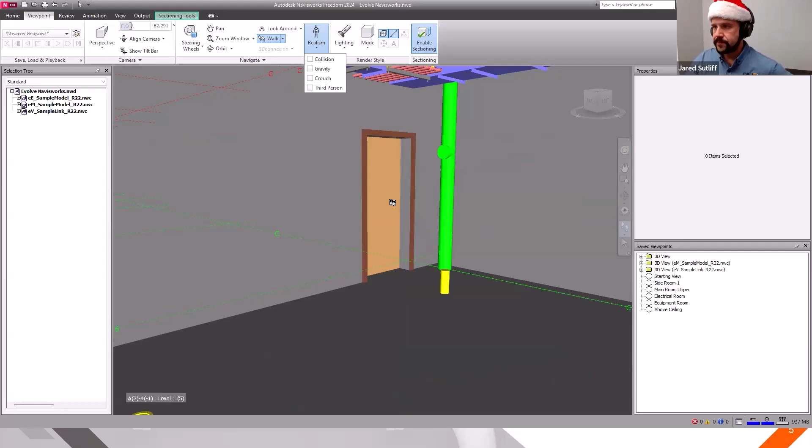I do have, this isn't so much of a question as an observation—they wanted to let you know that that is one majestic beard you have, and they appreciate the holiday spirit. I would second that myself. So no other questions other than that, just some appreciation sent your way.